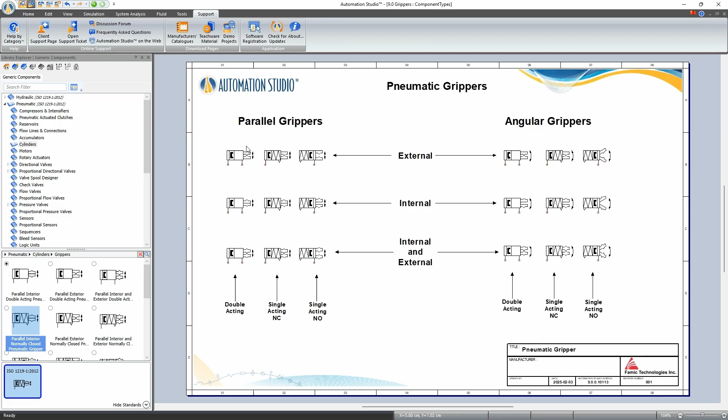They are a series of grippers which are divided into two different categories. So we have parallel grippers and angular grippers. And then within each, we have double acting, single acting normally closed, and single acting normally open. They are all quite similar in how they operate.

So if we just look at, for example, one here, and we look at the component image, what we have is a piston with a piston area and a rod side area. And this is linked by a mechanism which will open or close the gripper fingers.

Now, obviously, the parallel grippers open in a parallel motion. So if we look at the image here, you can see it goes from parallel close to open in this fashion. If we look at the angular grippers, similar type behavior, but instead of opening in parallel, they open at an angle here.

Like I said, there's double acting. Each of these double acting cylinders actually has the same behavior, but the only difference between them is the symbol. So this one shows an external gripping, so the fingers here are gripping on the outside of an object. This one would be gripping on the inside, and this can work in either fashion.

The properties of these, so when we go to configuring one of these components, you see we have piston diameter. We don't have rod diameter. And we also don't have a piston stroke, rather we have the finger stroke. So we define how far the fingers open and close, and then the software will calculate the equivalent piston movement here. So this is the basic data we have here.

We also have the technical specifications. This is information you will get from the manufacturer spec sheet, additional to the finger stroke and the diameter. And this will tell you how much force the gripper can apply for different pressure levels. So here, for example, at 8 bar, the gripper can apply a maximum force of almost 120 newtons.

And then depending on the distance of the object that it's gripping from the base, it can apply less force, generally speaking. So this is a parallel gripper. You see the slope is very, very shallow. So there's not much difference in distance on that one.

So we have two tabs here for defining the curves. We have the internal gripping. So even though this one is showing as an external gripper, you can still define it to have an internal gripping force, but then the external gripping force as well. And this here helps us to determine, based on the manufacturer data, the area and the amount of flow and so on that the gripper requires.

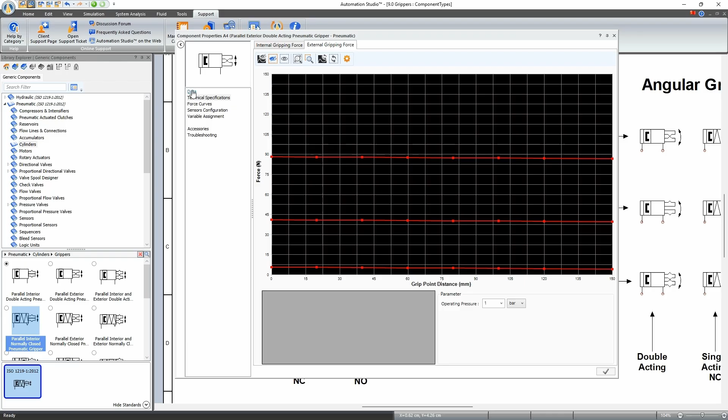So if we go back to the data tab here, we can see that we don't have the rod diameter. So this is calculated based on the ratio between the two different tabs here. That allows us to figure out what the equivalent rod diameter would be for that ratio of forces available.

The reason we had to do it this way is because in a lot of the manufacturer specifications, they don't actually give the rod diameter information. So we made an assumption based on the difference in the forces that will give us a difference of area on the piston and rod sides.

So this is for the parallel gripper. If we look at the angular gripper, we can see similar type behavior. The curves here, in this case, because the distance of the object has a bigger effect, if we just look at the image here, due to the fact of it rotating, the further away the object that you're grabbing is, the more torque you have to exert to apply the same force. So these are the angular grippers.

So a lot of the data here is quite similar between the angular and parallel, but there are a few small details. For example, in the parallel, we defined a spring constraint and a spring stiffness. So here, even though this one has no spring on the symbol, you can apply a spring on either side, which doesn't change the symbol, but it will just add that behavior to the gripper. And with this, you can apply a spring stiffness.

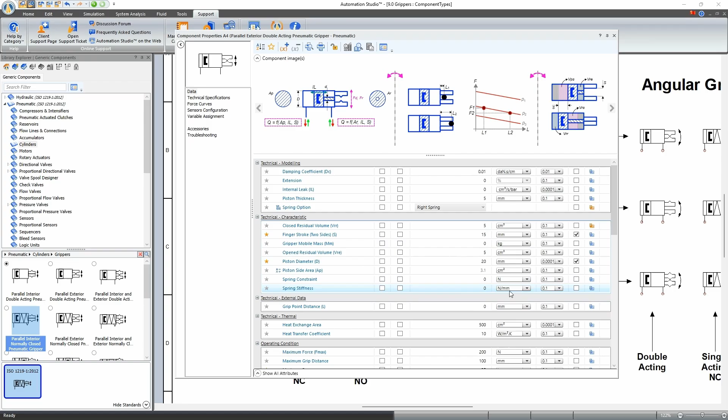So it will have an initial force required to start to move it, similar to the cylinders that we have already. And then the spring stiffness will be newtons per meter, newtons per millimeter. So the displacement here is linked to the finger movement. So we apply the spring force directly onto the fingers.

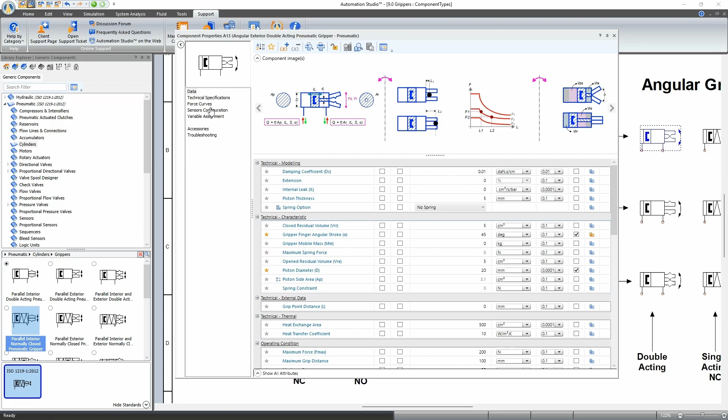For the angular gripper, it was a little bit more complicated to link the spring force to a linear position. So what we did instead was just to set a spring constraint, which is the same, but then you can have the maximum spring force. So you just put the min and max force that is applied, and this is compared again with the curve data. So for example here, if we look at a data point at 74 newtons, if you have a spring force of 10 newtons, then your available force is reduced by 10 newtons. So it applies directly to the curves here.

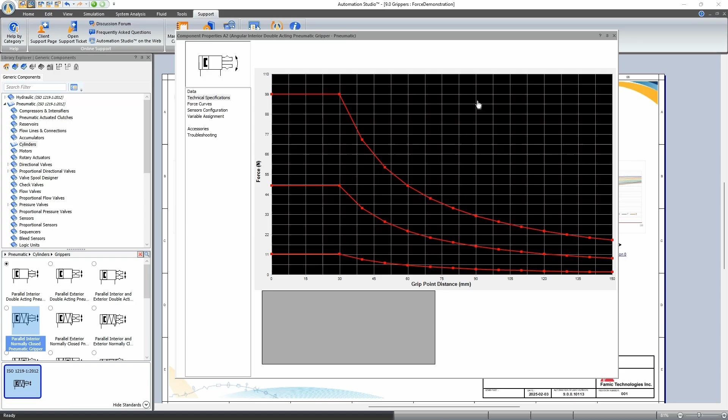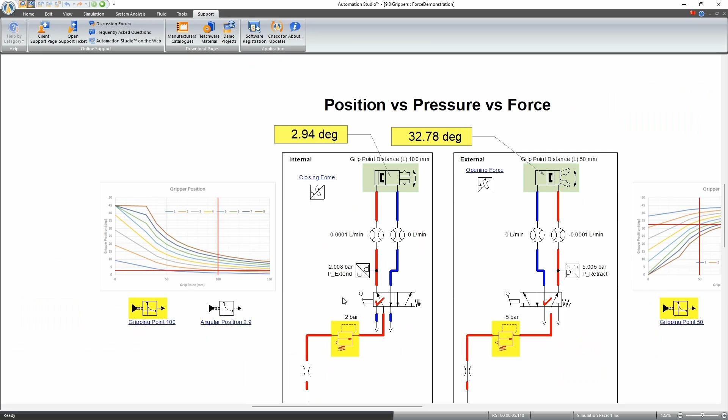And that's it. So then just a demonstration of how this works in reality. So here I have configured this gripper. I'm using the angular one because it's a little bit easier to see the difference in some of the data points. I've configured it with a spring constraint of 0 and a spring force of 100 newtons. And this graph here will show how far the gripper opens depending on the pressure that I'm applying. I have a gripping point in this gripper of 100 millimeters. So the object I'm gripping is 100 millimeters from the base.

And based on the data in the gripper, I was able to create this set of curves, which will show how far the gripper will open against the spring force for a given gripping point and pressure. So if we look at this here, for example, the gripping point of 100, 2 bar, we're able to open to 2.9 degrees. If we increase the pressure here, we can open it all the way to 13 degrees.

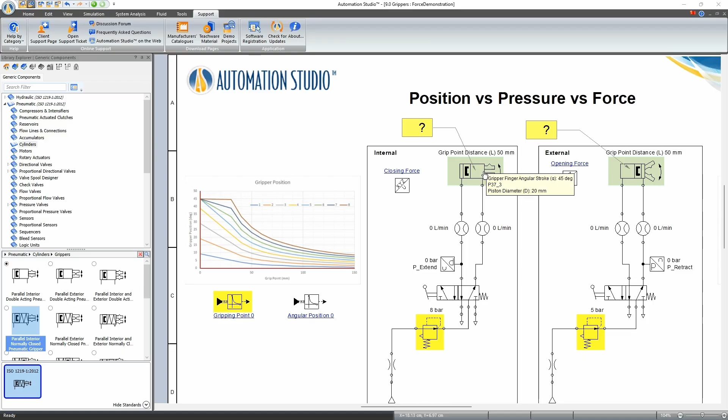And if we change the grip distance, say let's reduce it to 50, and then we try the same thing again. So now we can open it much further because the object is closer, it's easier to grab, and we're able to open further against it. So this is just a demonstration to show the link between the grip distance and the force and pressure available. But this is not how you would normally use this kind of a component. This is just to show you some of the parameters.

If you want to actually use this, let's say you're emulating that you're grabbing an actual object. So you have something like this where the object, in this case it's the internal one, so you're grabbing an object which is on the outside of the component. This will apply a hard limit onto how far the gripper can open. So the gripper fingers will open until they reach the component, and then they will stop at that point.

So if you wanted to emulate that sort of a force, what you would do is something like this. So you'd have a driving force curve of 0, so nothing is happening. And then once you get to the point at which you grab your object, your force will suddenly increase.

And here you would need to set both force curves, so the extension and the retraction curve, you will need to set both. Because if you only set one, it is not coherent with what the actual real world situation would be, but it would also cause some instability in the system.

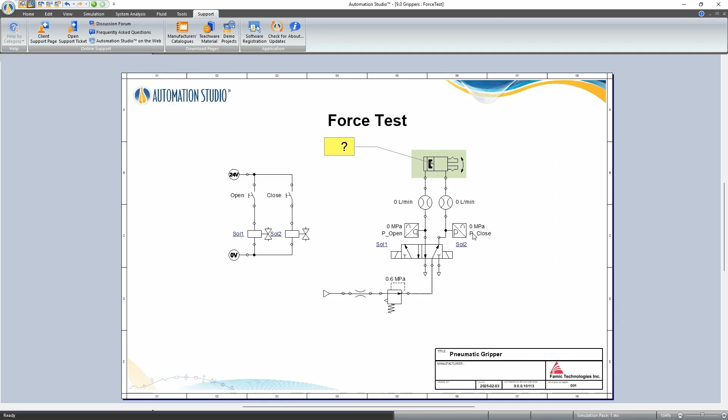So here, if we activate the solenoid here to apply the force on one side, you can see that the gripper will open until it reaches the object, and it will maintain whatever pressure you have on this side, and then we can close it.

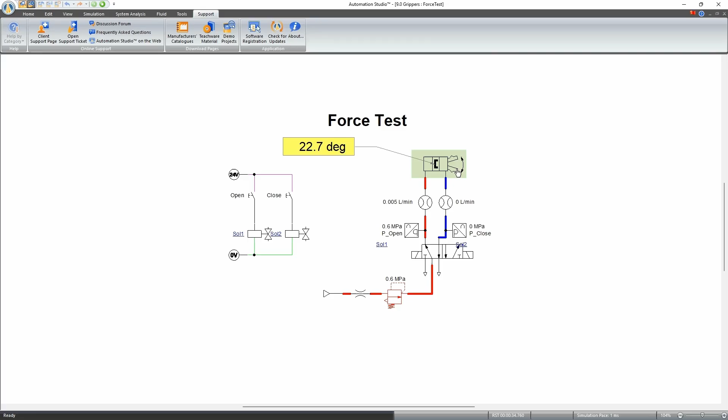So this will calculate obviously the amount of pressure required, the position versus the pressure, and how much flow is needed. So if you're doing repeated cycles, and the amount of gas that you're consuming is an important parameter, then it calculates correctly the amount of gas based on the information that's available in the specification. So that's basically it for the grippers.

The next topic today is the new mathematical blocks. So what those are is a collection of blocks. So we have a workshop here. If you have the license in your Automation Studio, you'll have a library here of blocks. What these components allow you to do is build a circuit using different calculations.

So you can have different types of input, square waves, sine waves, or even just a cursor. You can use different mathematical operations, so the basic addition, subtraction, multiplication, sine, cosine, various operations that there are there. So we're constantly adding new components to this workshop. And in this current version, I'm just going to show you the new ones that we've added.

So I'll start with the new adapter blocks. So again, these components are new in this version. We have previously had adapter blocks, and these are in this section here. So they're broken up into the different workshops. So if you want to create an adapter, a fluid adapter, so hydraulic or pneumatic, electrotechnical and mechanical.

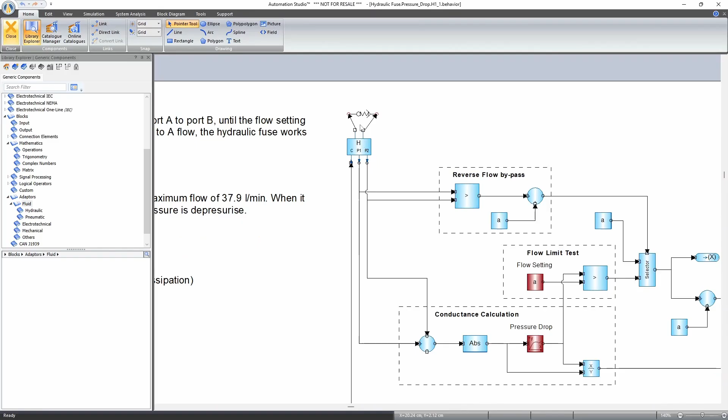And just in case you're not aware of these, just to show you what the adapters are for, you can use them in conjunction with the custom component to create a whole new component. So for example, here I have a component which is called a hydraulic fuse. And if I open up this component, you can see I have one of these adapter type blocks, which will read from the circuit that you just saw, send the information to the different components, and then the output from that will be sent here in terms of a conductance value, which will then be used in the circuit here.

So in this version, we've added a few different adapters. So one of them, these two here, they've added pressure source, so you can actually generate pressure, temperature source adapter as well. So you can see that there's different adapters here.

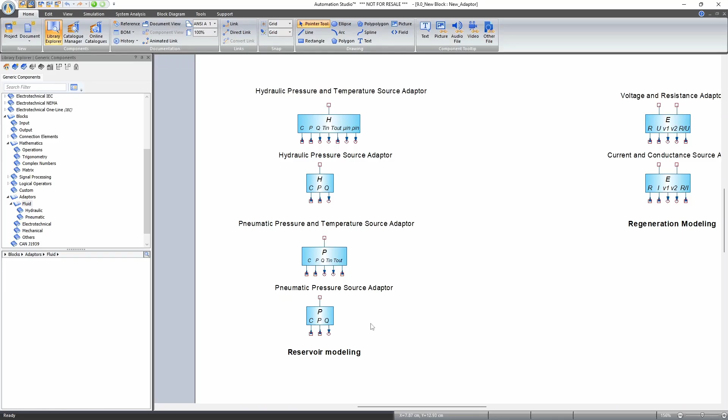So if you've been using these blocks before, and there's one or two different functions that you wouldn't have been able to implement, for example, we can now create reservoirs in the hydraulic or in pneumatic and accumulator, for example, or in the electrotechnical, we can do regeneration. So if you have a battery that's recharging, for example, that is something that is now possible.

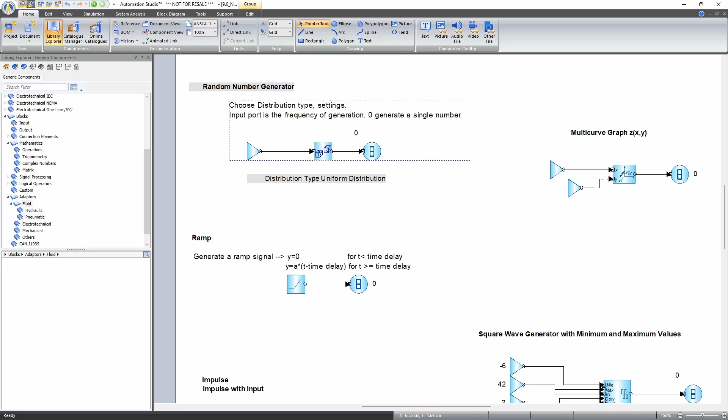We've also added new input component types. So the first one here is a random number generator. You can create random numbers using different distributions. So you can either have a uniform distribution or normal distribution, and depending on which type you choose, you can either select upper and lower bounds or mean and standard deviation.

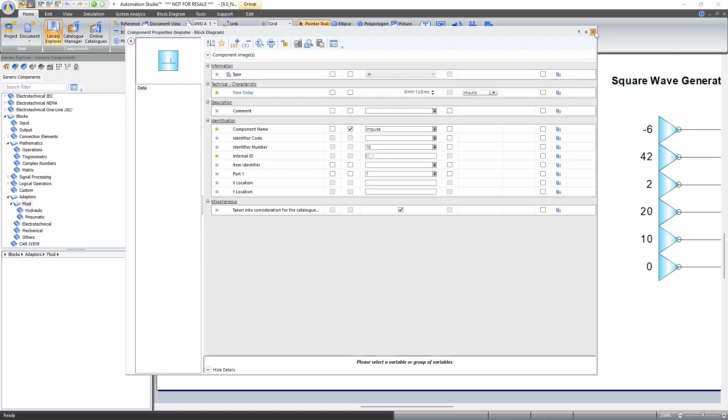We've added a ramp. So this is, as the symbol suggests, a signal that's 0 for a certain amount of time and then gradually increases over time. We've added 2 impulse generators. So one is just a straight impulse generator where you can, in the properties of the component, set a time. So you'll have a 0 signal for a certain amount of time, then you'll have an impulse at that moment that you've specified, and then 0 afterwards. And then this one is the same, except rather than setting the delay in the properties, you set it using a cursor.

Next component here is a fairly useful one if you're creating your own components. This is a multi-curve graph. So what this allows you to do is to do an interpolation between different values. So this component takes 2 inputs, x and y, and then uses those inputs to determine a z value.

So for example here, we're expecting x values between 0 and 100, and the y values here, we have 3 different curves here, so for 0, 20, and 40. So how this works, if I have an x value input of 50 and a y, let's just select 0 here and click on the curve here. So we have a y of 0, then our output will be 10.

If our y is 20, so this curve here, we will have an output of 20. And then if my y is somewhere in between the two, we will get an interpolated value between those two curves. So just to demonstrate that, I'll just run the simulation.

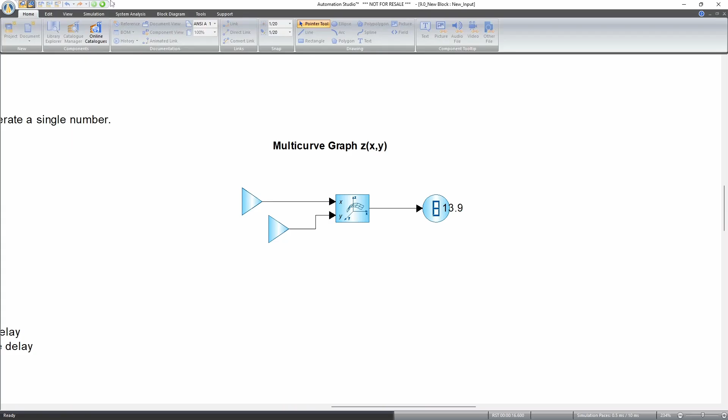So I'll set my x to 50, my y is 0, and my output is 10. And if I set my y to 20, my output is 20. And if I go in between the two, you'll see the value varies accordingly. So this can be useful if, for example, you're creating a relief valve or some similar type component that has multiple curves, and you want to interpolate the values between those.

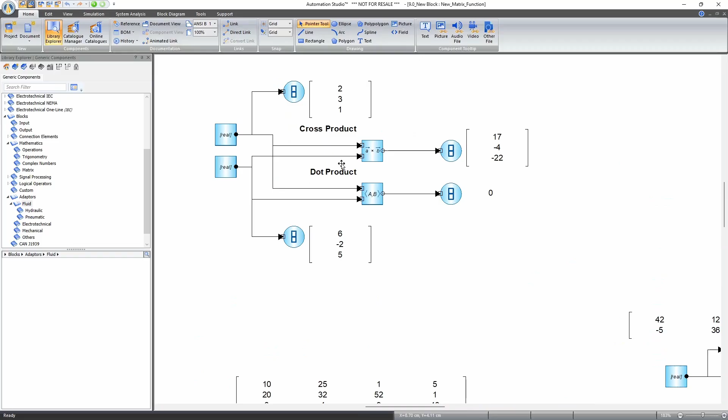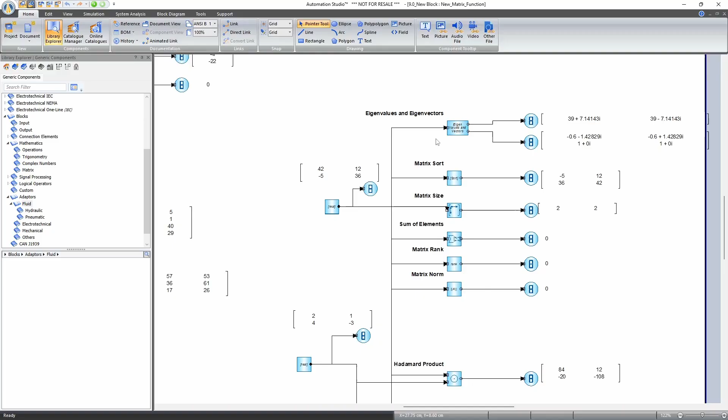The next group of components are different matrix functions. So most of these are, you either understand them or you don't. If you know what a cross product is, well, that's what the matrix function here does. Dot product similarly. You can do convolution functions. You can do then other matrix functions, for example, eigenvalues and eigenvectors. So you send your input matrix, it will give you both the eigenvalues and the corresponding eigenvectors.

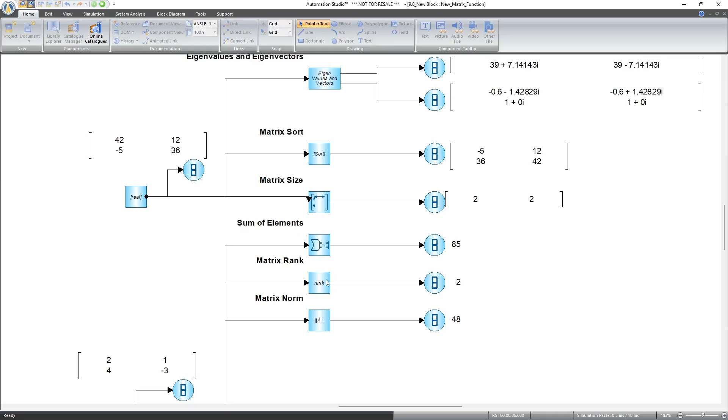You can sort your matrix. So the values of the matrix you can sort by row or by column, increasing or decreasing. You can get the matrix size. So you can see all of these are showing the values from the previous time that we ran the simulation. Some of the others actually I'll have to run the simulation so you can see. But if we look at, this is our input matrix here, we can get the sum of the elements, the rank of the matrix, and the norm of the matrix.

And then at the bottom here, we have 2 other matrix operations called the Hadamard product and the Kronecker product. So if you know what those are, you'll know what these functions do. If, like me, you don't, well, then you don't, but they do as the name suggests.

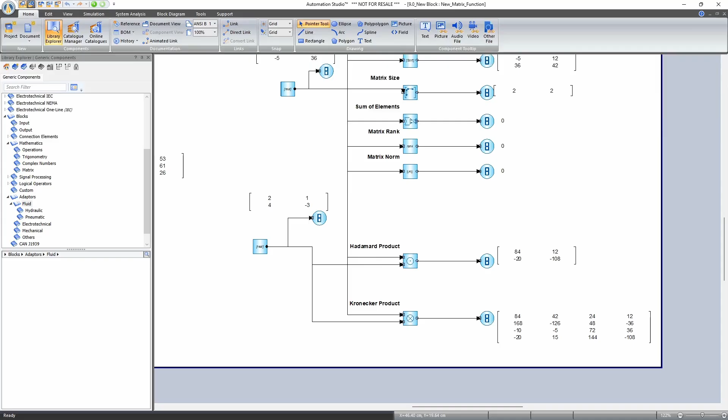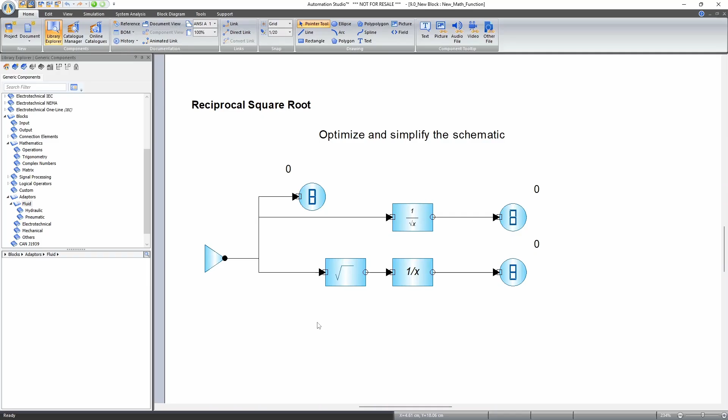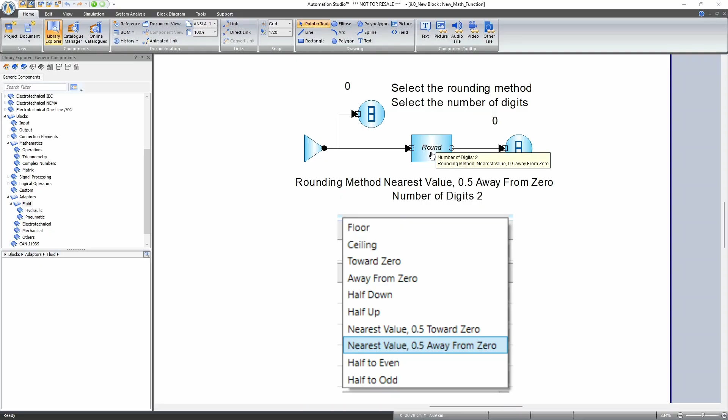And finally, we have in this section a round component. So you can choose one of many different methods to round: floor, ceiling, towards 0, away from 0, and so on, as you can see here. One possible use for this is if you're using a selector. So a selector is a component that has multiple inputs. You can choose from one of the inputs. It requires an integer value as an input. So you might have a calculation that's choosing one of a series of values. You need it to round to a nearest value, so you can use this component, so then that input will be compatible with the selector.

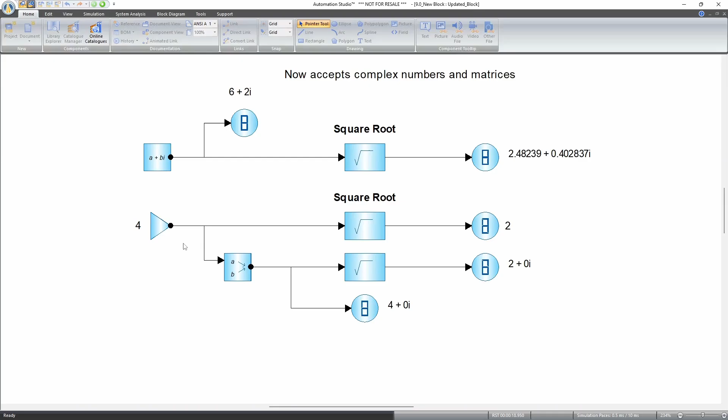You can also use it to calculate the square root of negative numbers. So here we have a cursor that's generating a signal of 4 while it's calculating the square root as 2. If I reduce it to 0, you'll see if I plug it in directly, so the 4 going into the square root, it's giving me an error once I go below 0. But if I send that signal instead to generate a complex number, so I have just the real part, which is negative, the imaginary part is 0, as we can see here, then you can calculate the square root of that and it will work just fine.

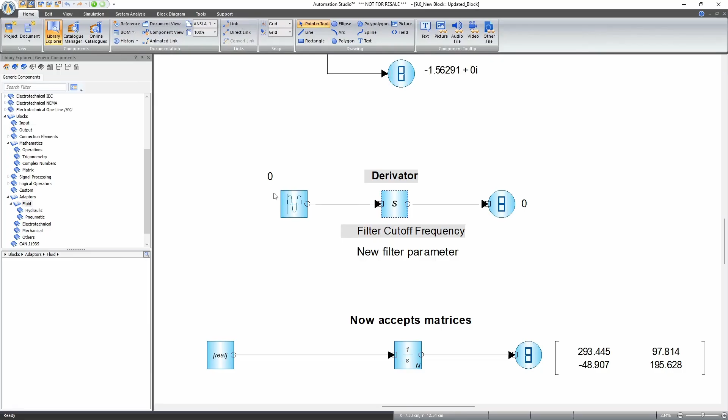Next component here is the derivator. Like I said, it's not a new component, it exists previously, but we've added in a filter cutoff frequency. This helps with stability sometimes with the derivator, especially if you're working with a cursor or something like this, where it's possible to change the signal very abruptly. Something like that would cause a lot of problems for the derivator. So having the filter cutoff frequency in there allows you to smooth out those transitions, so it shouldn't be as unstable as it may have been in the past.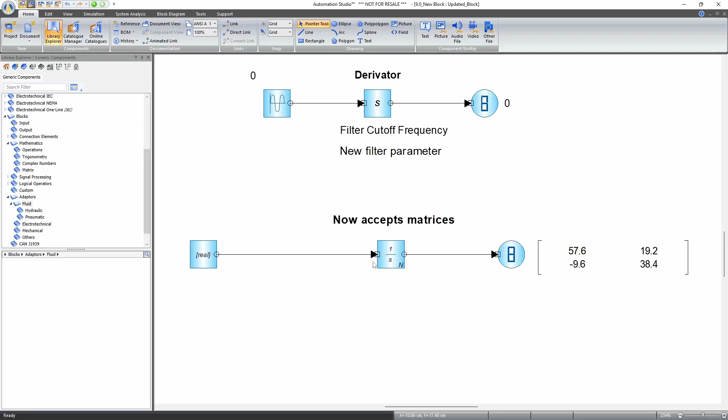And we now have this component which accepts matrices, so you can do the integral of a matrix. So that's it for all of the new mathematical blocks.

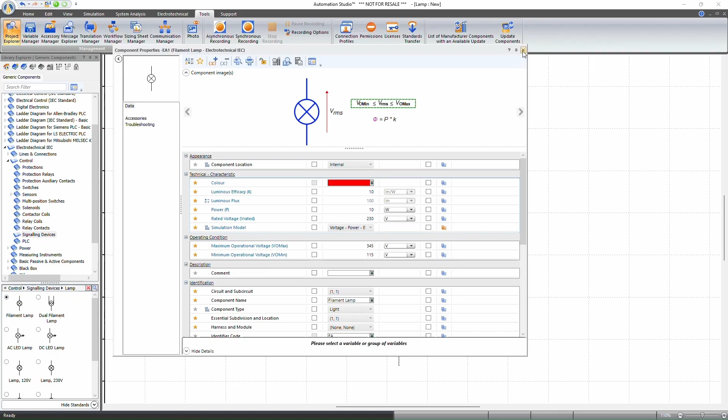For the moment, these modifications are applied on filament lamp, AC and DC LED lamp, rotating light, and the pilot light energized by a built-in transformer. So as an example, here we have 4 models of lamp. You can see here we have different symbols. We have rotating lamp, filament lamp, NEMA filament lamp, and IEC LED lamp.

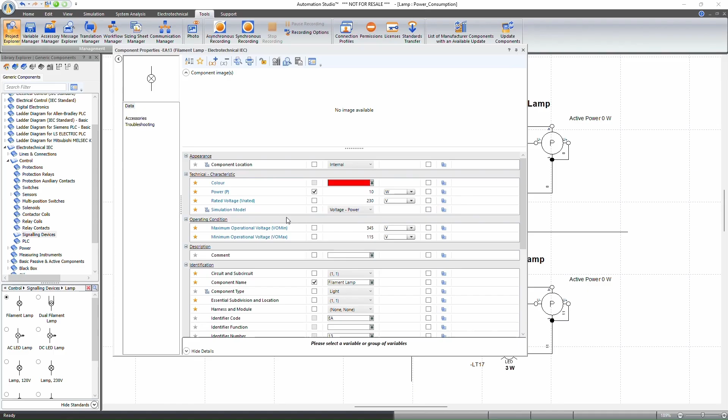If we double click, we can find that here I have set 10 watts as the power to be consumed by the lamp when powered with the rated voltage, and for each lamp we have set a value. For example, for this LED we have put 3 watts. So if I start the simulation and I measure the consumed power by a wattmeter, we can see that the lamp is consuming the same amount we have set in the parameters. Let me stop the simulation.

In the next version, these modifications will be applied on this type of lamp: pilot light energized by built-in transformer flashing, pilot light, signal tower, beacon flashing, and other samples of light.

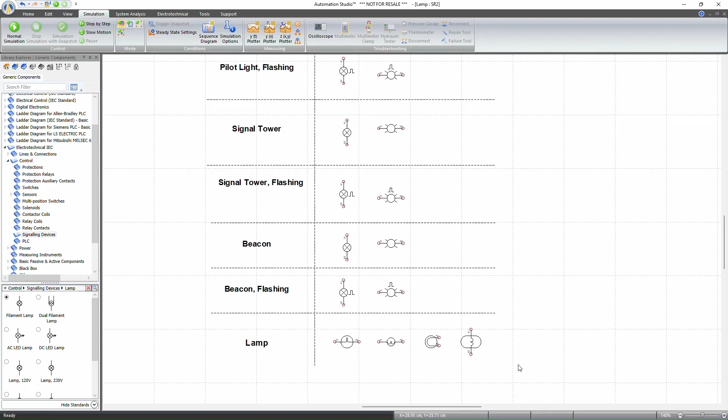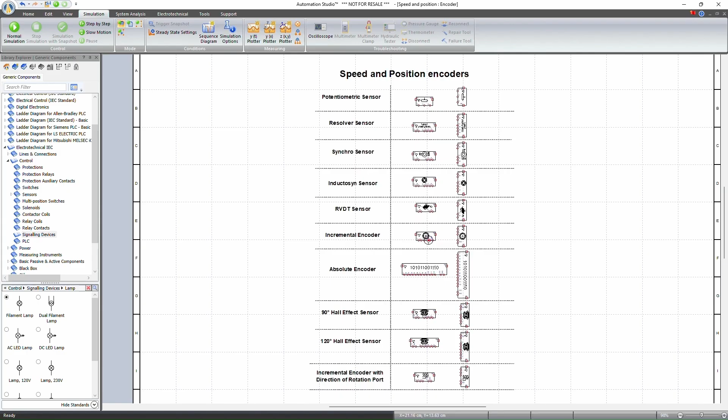That's one thing. The second thing, we have worked on the encoders and decoders. For this version, we have added many types of encoders. For example, Hall effect sensor in two types, 90-degree and 120-degree, the resolver, the inductosyn. We have also improved the incremental encoder. If you double click on any type, for example the inductosyn, you will find here the appropriate parameters that you can set to do the simulation. For example, in the incremental, we have the pulses per revolution, the rated power, the rated voltage, and so on.

In this version, we can assign the output signals like A, B, and Z. If you go to the variable assignment, you will find this variable here, so you can assign it to other variables and use it for motor control or any type of application. You can also display the absolute position, the direction of the rotation of the motor, and also the speed.

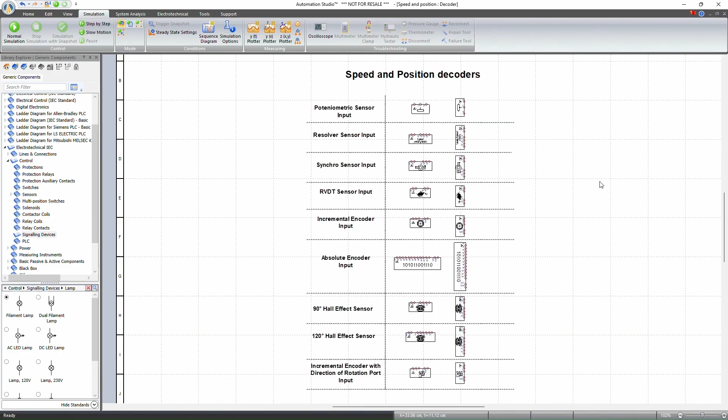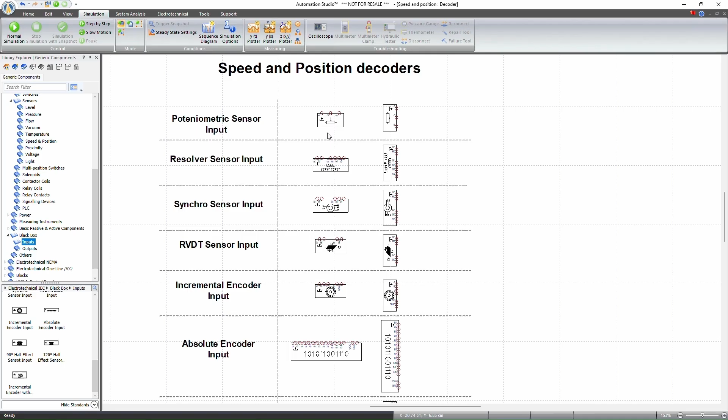For each type of encoder, we have developed a decoder. As you can see here, the encoders can be found in control, sensor, speed and position. For the decoders, you can go to black box inputs, and here we have the decoders. The decoders will read the output of the encoders and give us the speed, the angle, the absolute position, and the relative angle. We can assign these by variable to use them in motor control.

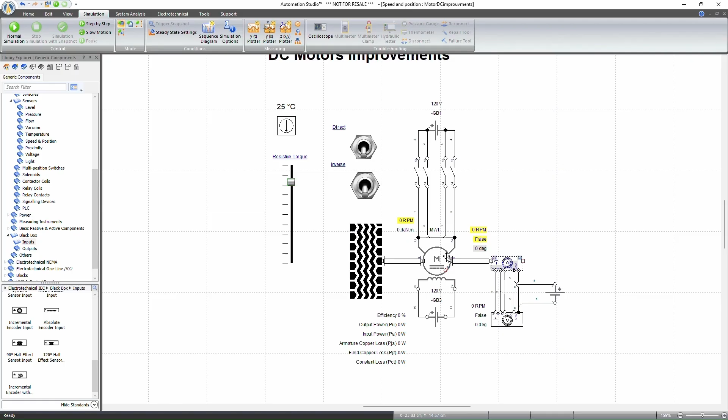To see an example, here we have a circuit with a DC motor, a slider to change the resistive torque applied on the motor. We have an incremental encoder; I have put the pulses per revolution at 100. I have a decoder, and just to mention that in this version for the DC motors, we have made three improvements. The first one is the calculation of the power balance in real time.

If you double click on the motor and go to this section here, you can see that we have added all the parameters we can calculate in real time, like efficiency, field copper loss, input power, output power. If I start the simulation and start the motor, you can see that these parameters are adjusting according to the environment. If, for example, I increase the resistive torque, you can see that the efficiency is increasing also. All the parameters are changing.

Okay, and the second thing, we have added the effect of the temperature on the motor. For example, here, if I take a plotter and drag and drop my motor, here I can plot the temperature.

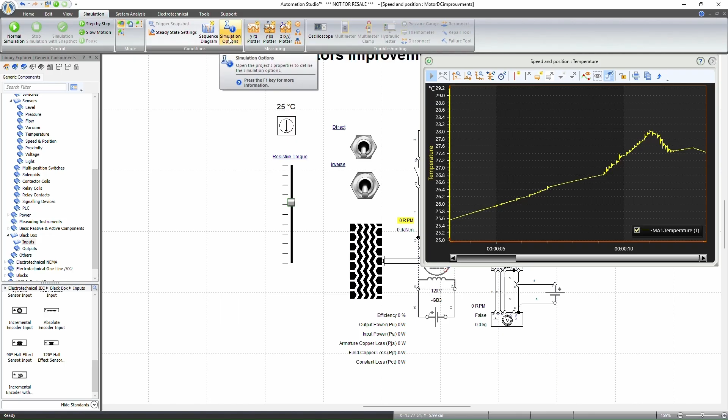If you want to do this simulation, you have to go to simulation options and activate the option of thermal evolution. If we start the simulation, here the motor has exactly the temperature, the ambient temperature of the environment. If you start the motor, you can see that the temperature starts to increase.

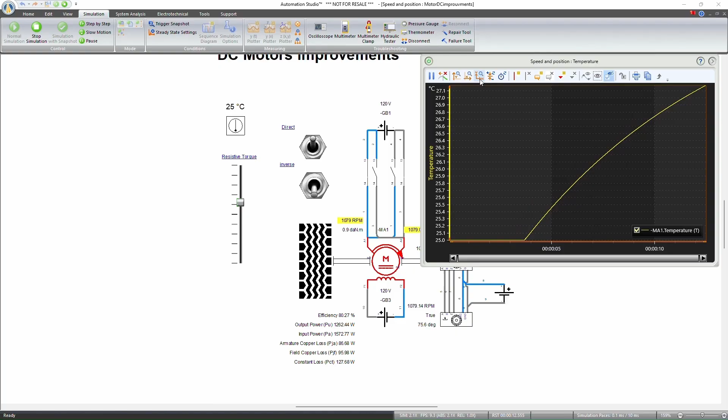Until it will be stable in the next seconds. So this calculation of the temperature depends on the internal parameters of the motor, like the thickness, the thermal resistance, the thermal conductivity, the contact surface. So we can change this if we want to change the behavior.

The motor's reaction to the environment. Another thing we have added in this version is the type of cooling for this. So we have added three types. The first type is the free convection. The free convection is when we don't have any active cooling on the motor. The second type is self-circulation.

If we choose this option, here in the power dissipated to cool the motor, we have to set the power we are using to cool the motor. By the way, self-circulation means that the device we are using to cool the motor is internal, like a fan inside the motor or something. So we have to put the power of this device in this parameter.

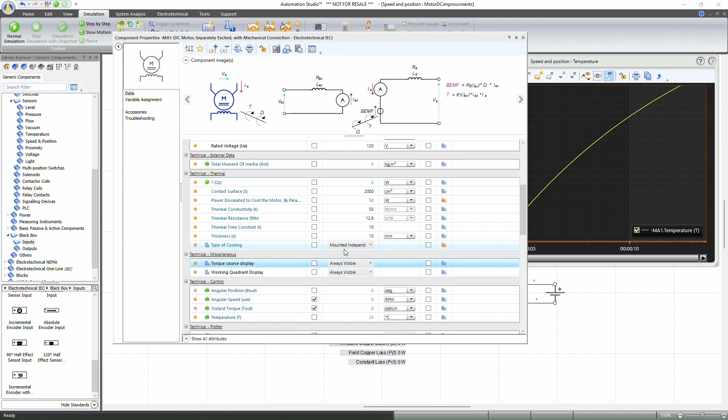The third type is the mounted independent component, and when we choose this, that means we are using an external device to cool the motor, and in this case we have to link it by this variable here in variable assignment. So we have to assign this variable to this one, and this one takes a dissipated power as input. So we have to link the dissipated power by this device to this variable.

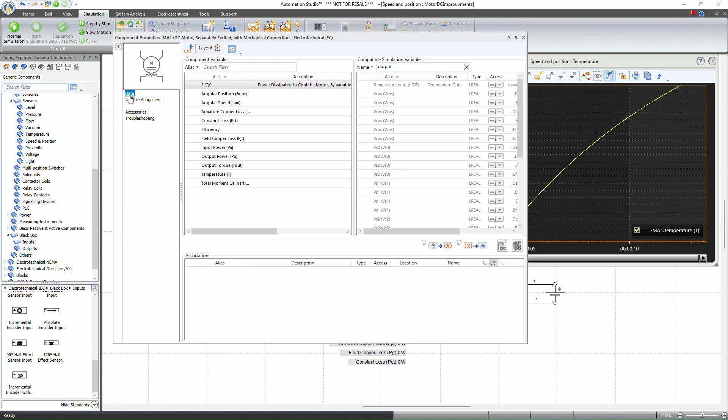So here, just to come back to the encoder and the decoder, if I take a plotter and drag and drop my encoder, here you can see that I can plot A, B, and Z. So if I start the simulation, start my motor, you can see how the A, B, and Z are working. And if I change the direction of the motor, for example, you can see the switch between B and A.

And for another thing, if I plot the real angle of the motor by dragging and dropping the motor on the plotter, and the relative position calculated by the decoder by dragging and dropping the decoder on the plotter, we can see that the two signals match and the decoder is working well.

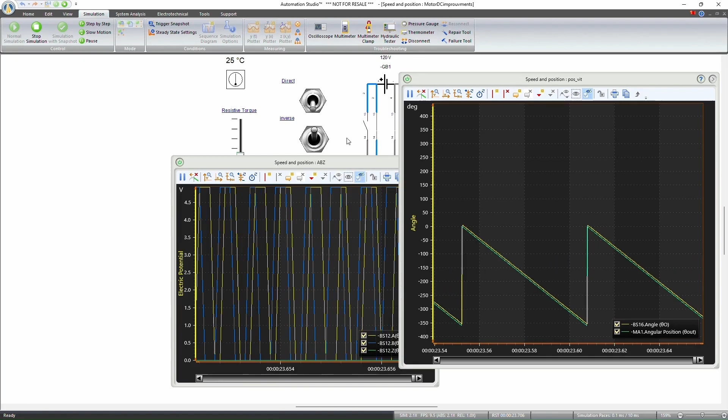So for this version we have worked also on the current transformer. For the current transformer we have made two simulation models. The first one is the simplified model, and this one allows the use of the parameters we find usually on the data sheets, for example, the rated primary current, the rated secondary current, the security factor, and maximum thermal current setting.

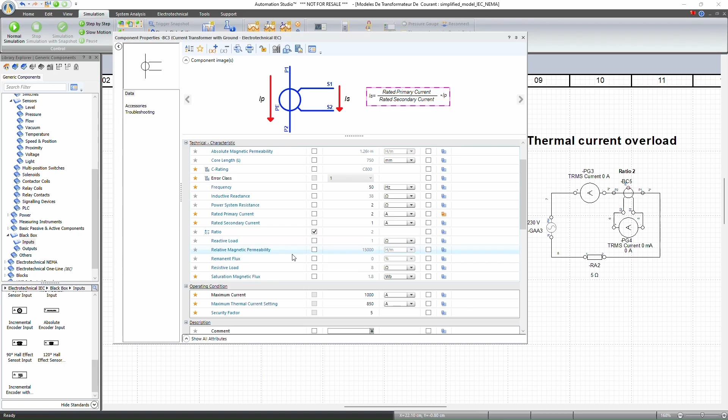So this model, if you give it a primary current, will give you a secondary current, which is the primary current divided by the ratio. If I start the simulation here, you can see as an example, here in the input I have 4.6 amperes. The output is 2.3 for the ratio 2, so that makes sense.

And for the security factor, you can see if we exceed 5 times the secondary current, our transformer will saturate, and if we exceed the thermal current overload, you can see it. Here, if I bring up my message explorer and reduce the resistor, we will have a warning message that indicates we have exceeded the maximum current between the connector P1 and P2.

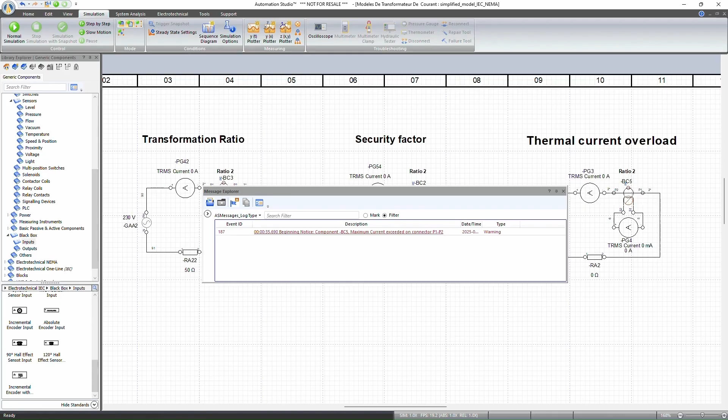And second, for the current transformer, we have developed a theoretical model that allows us to see the deeper phenomena relating to the internal construction of the transformer. So in this model we take into consideration parameters like saturation magnetic flux, resistive load, remnant flux, and other parameters. So with this model we can see some phenomena like the saturation.

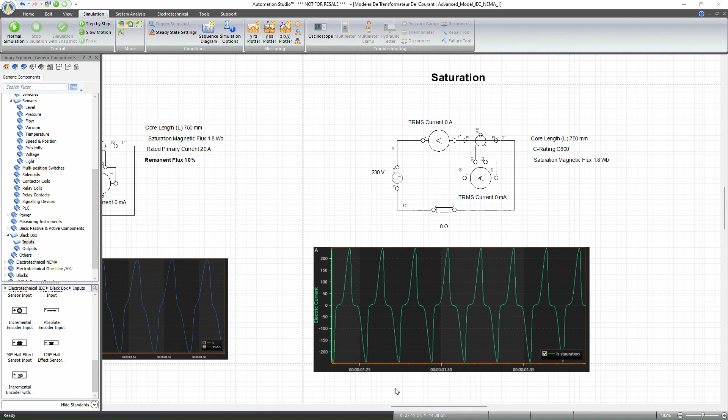We can plot the graph of the saturation. So we can see here the form of the graph when the current is too high, and we can, for example, compare between two parameters. Like here we can see that when the remnant flux is higher, the current transformer will saturate faster.

Also for this version, we have developed an option. If I go to Tool, Communication Manager, and go to CAN, here we find a new option called Bus Speed, which allows us to choose which speed we are using in the communication.

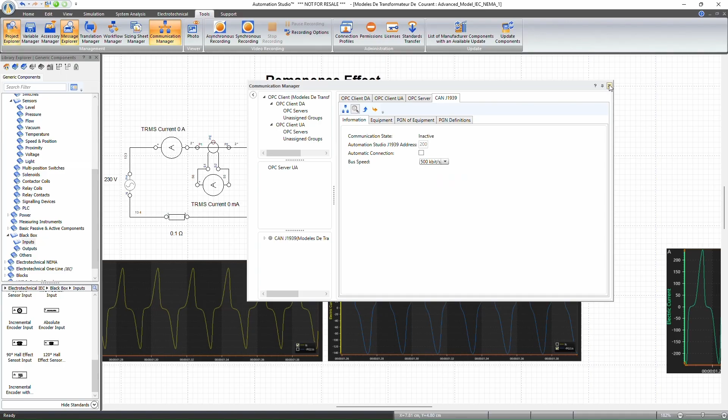Also in SR1 we have made improvements to the illustrated library. If I click on open library, we have made changes in two libraries. The first one is North America Residential Electricity, and here we have added a new category called Blueprint. This category allows us to design architectural plans and put electrical details.

In this category we have components that allow us to design the architectural plan, like frame, doors, stairs, kitchen, bedroom, appliances, and others, in small and large sizes.

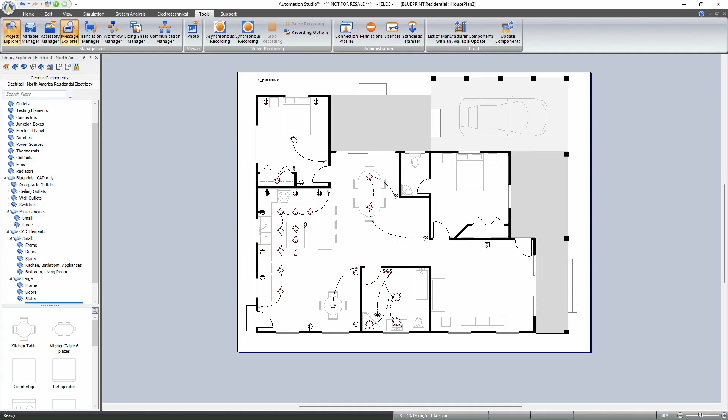To show you all the types of components we have added, on the electrical side we have added many symbols like switches, wall outlets, ceiling outlets, and receptacle outlets, which can be found here. For every category we have two sizes, small and large.

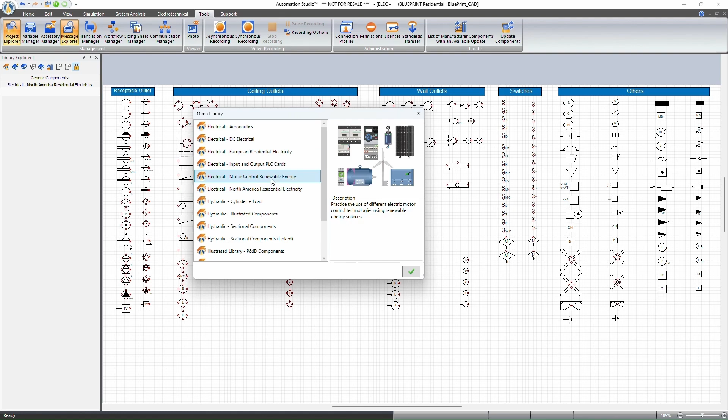The second thing we made is in motor control and renewable energy, where we have added a new category: passive components. Here we have added optocouplers, thyristor, transistor, diac, and triac.

For example, if you double click on the optocoupler, you can find the parameters you can change, and these are taken into consideration. For the triac, we take into consideration the gate trigger current for the four quadrants, the holding current, and the gate voltage.

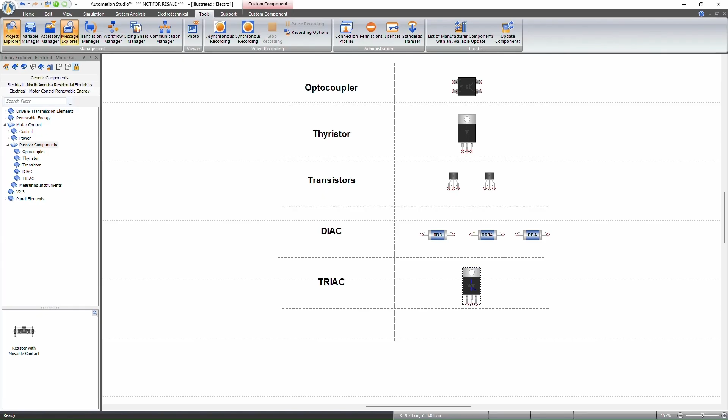That's for SR1. I also want to mention that for SR2 we will make an improvement on the solenoid. We will have many types: on-off DC, on-off AC, with and without protection, solenoid with rectifier, proportional DC solenoid with and without protection, and proportional solenoid with integrated control.

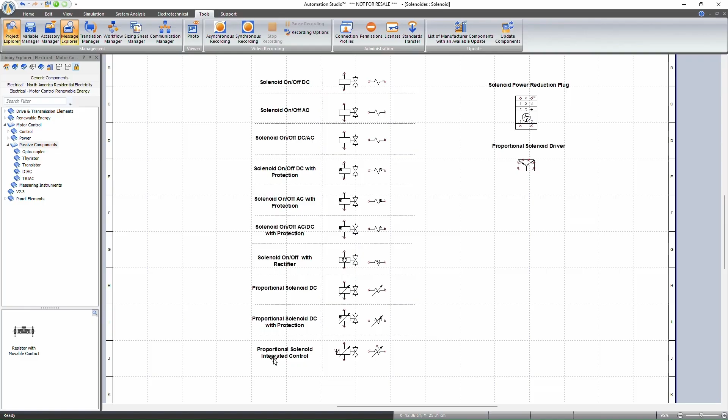We also made this component which reduces the absorbed current at starting, and also the proportional solenoid driver to pilot the solenoid. This pilot has many options, like dither function and different input signals: PWM, current, analog voltage, free current. So we can set our own value.

For example, if I choose free current range or free voltage range, I can put the values I need myself, the same for the output signal. We can also change the PWM frequency. We have the ramping option, where we can activate or deactivate ramping, modify the ramp down and ramp up time, and modify the gain, for example. So we have many options here.

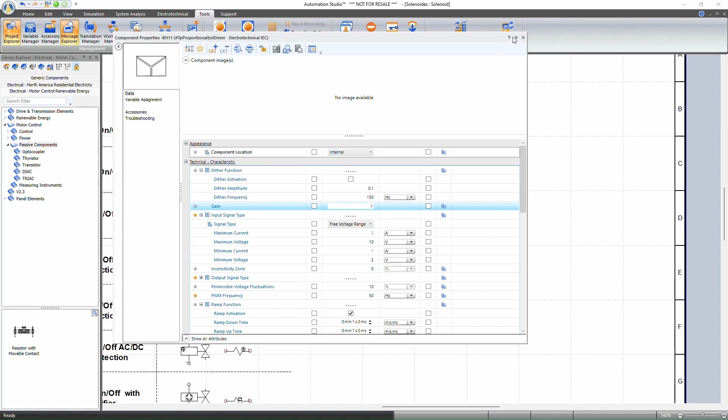As an example, I want to show you if I pick this solenoid with the integrated control. Here I can change the consumed power, the rated voltage, and the signal type that the solenoid can read from the external controller. So here I have to put a signal, like choosing from 0 to 5.

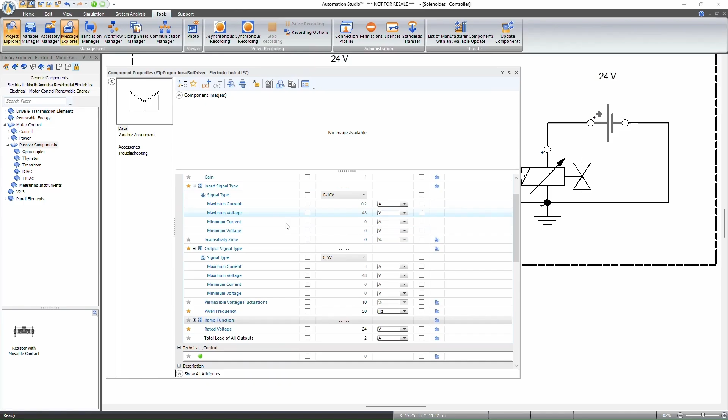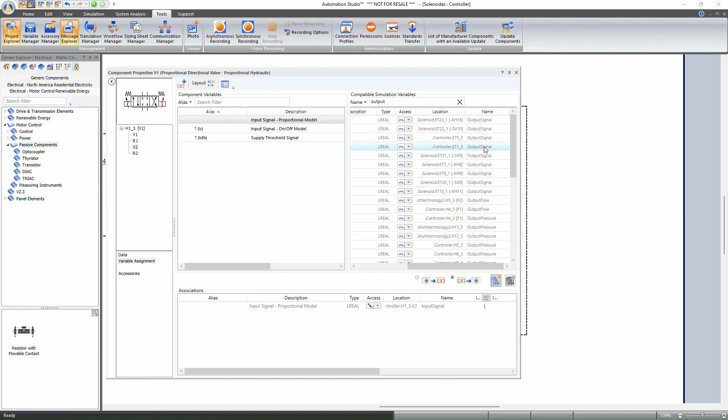I can also configure my controller. As an input I will set 0 to 10 volts, and for the output it's 0 to 5 volts, so the solenoid can move accordingly, with no ramping function. I can change the input of the controller with this slider from 0 to 10 volts. Then I go to my hydraulic distributor, click on the coil, and link it to this output signal. Now I will start the simulation.

If I change the input, we can see that the distributor is moving accordingly. So I can change the position of the distributor by changing the input voltage on the controller.

Also, in this improvement, we have added the effect of temperature on the solenoid. For example, if I double click on my component and scroll down a little bit, you will find a new section. This section has many parameters, like the material of windings, specific heat capacity, temperature coefficient of the material, and heat transfer coefficient. All these parameters are taken into consideration to simulate the temperature of the solenoid.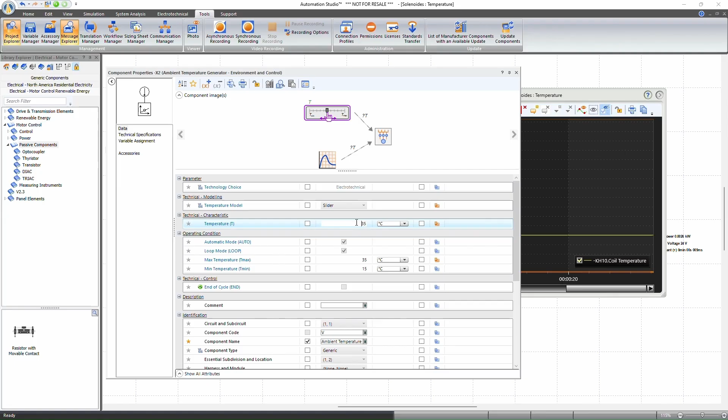For example, if I take a plotter and drag and drop my solenoid, I set the initial temperature to 25 and start my simulation. I close my switch, and I can see that the temperature of the solenoid is bigger than the ambient temperature we set, because of the dissipation.

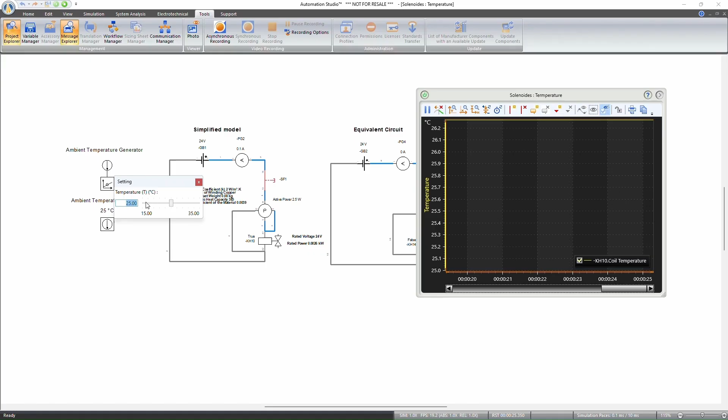If I increase my ambient temperature a little bit, let's put it at 35, we can see that the temperature of the solenoid moves up until it achieves a stable level, and it will be more than 35 because of the dissipation, which is also taken into consideration.

So in this context, we can also see the effect of temperature on the solenoid. Let me take a new example here with a proportional solenoid, it's the same thing as the example I made for the controller.

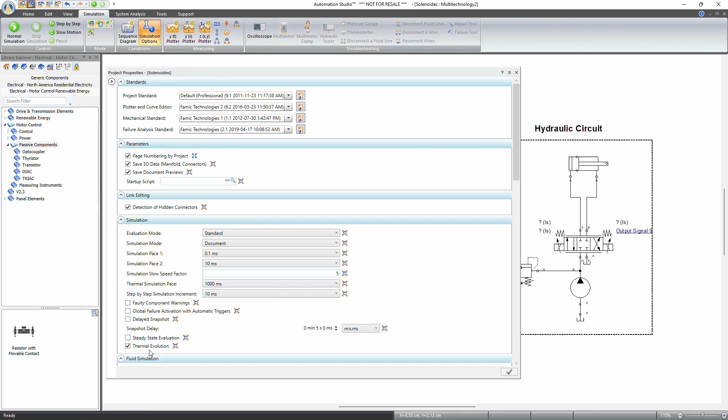Here I have to go to simulation options and activate thermal evolution. This solenoid is linked to the hydraulic circuit. I will set my first temperature to be 25, and I want my output signal to be displayed.

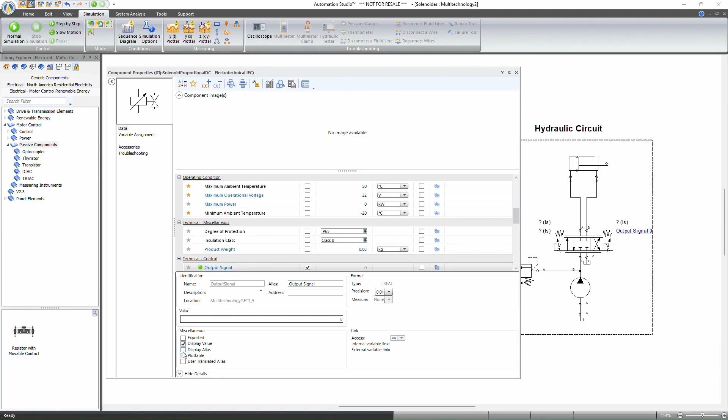Okay, just a second here, and here I have to start the simulation.

And here we can see that we have a position. The output is 55.48, and now if I change the ambient temperature, you can see that the position, the output, is changing, which will make this distributor change position. So maybe in this case the change is not significant, because the change of temperature is not significant.

But if, for example, we go from 35 degrees to 100 degrees for some reason, we can see that the change in the output will be significant.

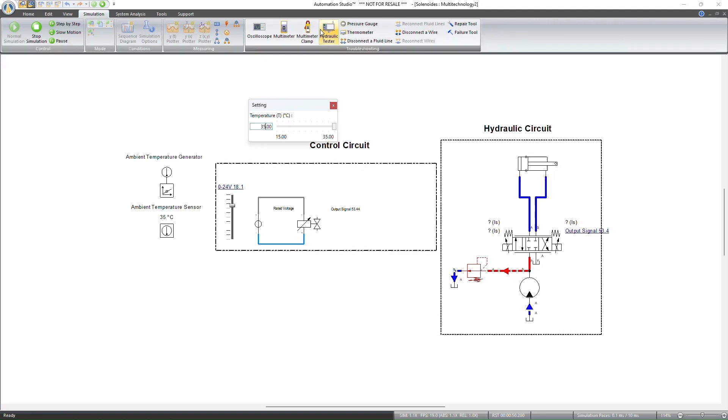The last thing about the solenoids: let's just go to this model here. If we double click on the component, we'll see that for each solenoid we have 3 simulation models: simplified circuit, equivalent circuit, and dynamic model. For the simplified model, we take into consideration the rated power.

So when we activate our solenoid, the power that will be consumed by the solenoid will be the rated power. If we choose the equivalent circuit, here we can set the values of inductance and resistor for this solenoid.

And the dynamic model takes into consideration, for this DC on-off type, the rated power, the rated voltage, and the time constant to help define the transitory regime in the first second.

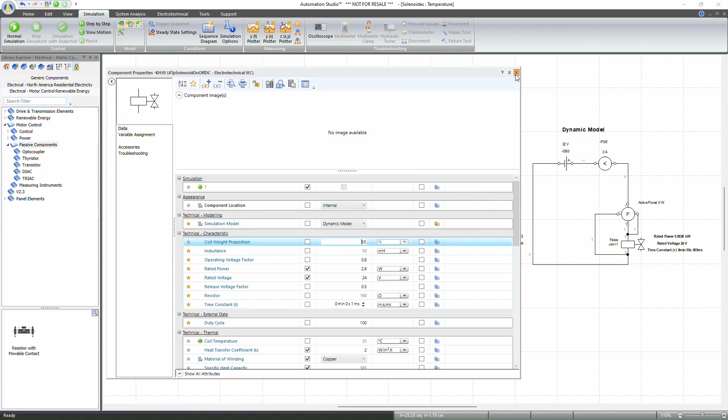But if we take another type, for example the AC model, here we will find that we also have three models. For the simplified circuit, we will take only the holding power. For the equivalent circuit, we can set the inductance and the resistor, and for the dynamic model we will be considering the holding power and the initial power.

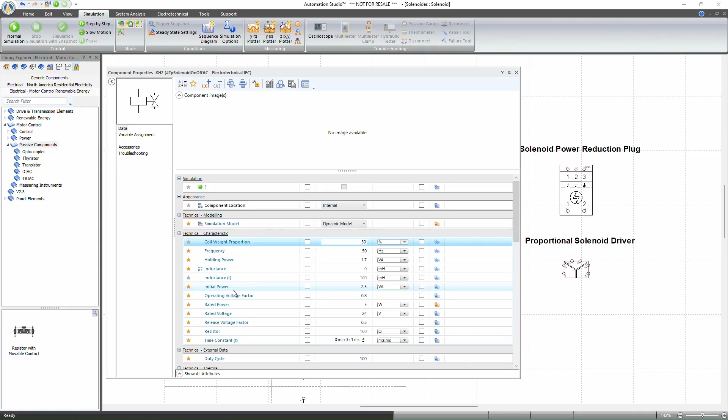If I take an example in the simulation, I want to simulate the current of the three models here: simplified model, equivalent model, and dynamic model. And I start the simulation.

If I take, for example, the simplified model and close the switch, here we can see that in the simplified model the current goes directly from 0 to the maximum current.

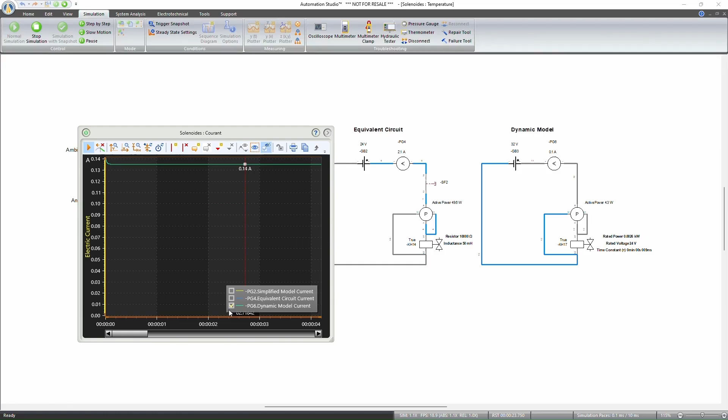And the last example is the equivalent circuit. So the equivalent circuit, it's an RL circuit, the blue one.

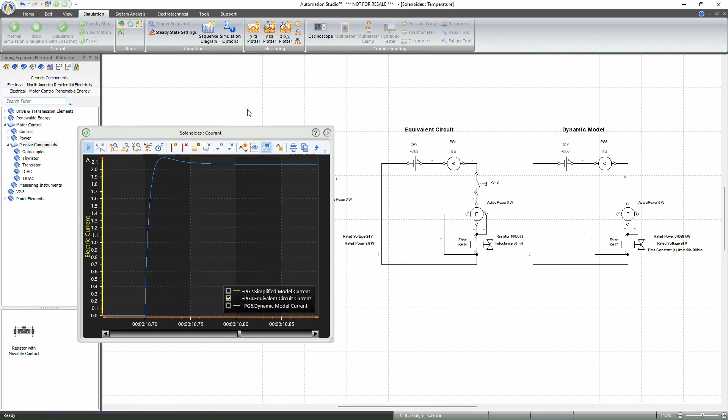So if I stop the simulation and zoom in a little bit, we can see here that the solenoid behaves as an RL circuit. So that's it for the solenoids, and that's all for the electrical part in this version and in the version SR2. Thank you.

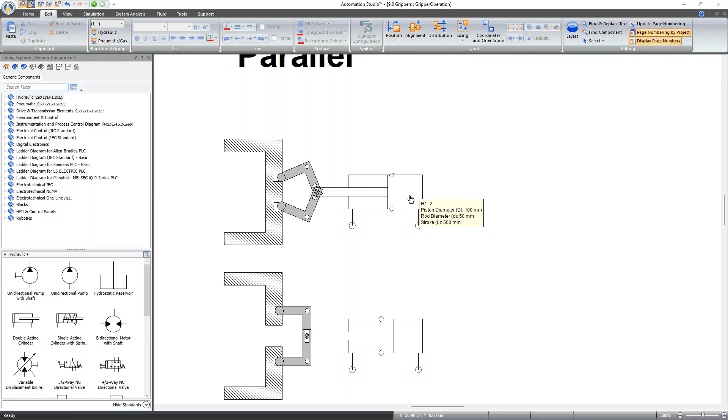So in the background, you have some sort of mechanism like this, whereby as the piston moves, it moves a sort of mechanism that we don't necessarily know, but it moves linearly. So depending on the position of the piston here, the grippers will open more or less the same amount. If the piston is at the base and it moves 1 millimeter, this will move a certain amount of millimeters based on the lever ratio.

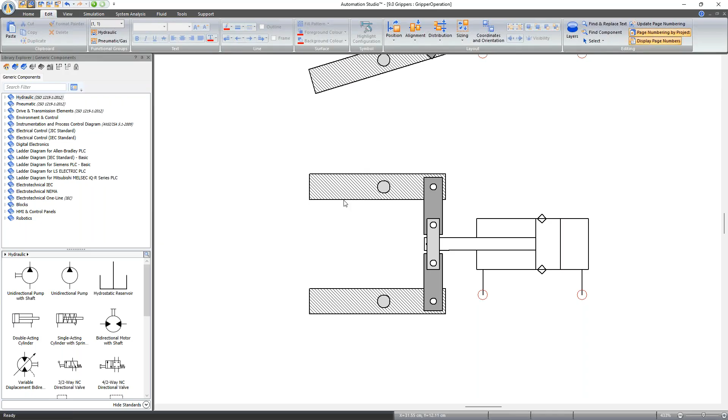That's the kind of operation that we have. So this is not the toggle type. The toggle type here is something where it's a bit more extreme. So for now we don't have these, but if you look at, say, the position of this piston here, you can see that if the piston moves here, the gripper fingers won't move very much. So the movement here is not linearly related to the piston position.

So this is not something that we can currently do, but if there's a request for it, we can add it in a future version. We decided that the majority of the grippers on the market have a more linear behavior, so we just implemented that for this first round.

Good, thank you, Shane. We have actually another question related to the grippers, so I'll ask you that now since we're on the topic. Yeah, so these grippers are all 2-finger grippers. Can the model be used for 3-fingered grippers? It can, but you would need to make a slight modification.

So just let me go back to my main page here. So the way we calculate here on the technical specifications is based on the information here. So this is the grip force on one finger, so on each finger normally. So in this case, we have a single finger. Each finger is giving me a force of 120 newtons, more or less.

If you have 3 fingers, then you would need to modify the curve here to account for the fact that there's 3 fingers. So if your specification gives you 3 fingers of 120, what you would need to do is say make 2 fingers of 180. That would give you the equivalent force and equivalent pressure on the piston side, the pneumatic side.